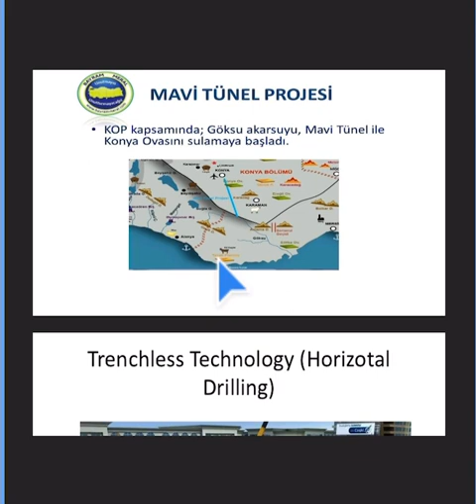Okay, I'll go through. So that's the Blue Tunnel. Blue Tunnel is the project of the two basins, between two basins. One basin has plenty of water, plenty of drinking water, and we're taking all the water from one basin to another. That is the project of the Blue Tunnel. The name of the project is the Blue Tunnel Project.

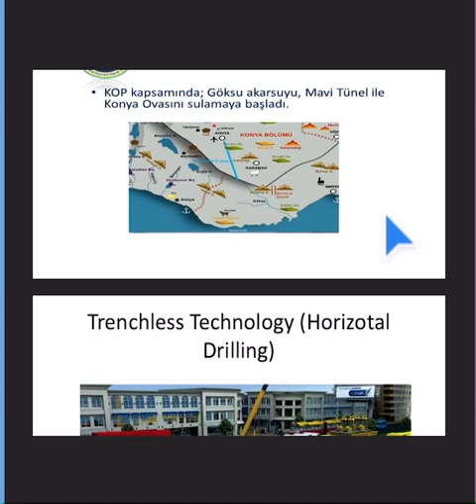And then trenchless technology, horizontal drilling. This is also a new part of water resources engineering, where without disturbing all the crowded roads on the surface, you just drill the horizontal pipe or horizontal line underground without disturbing all the traffic.

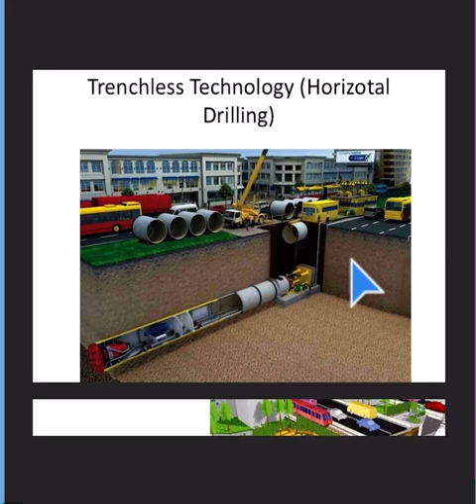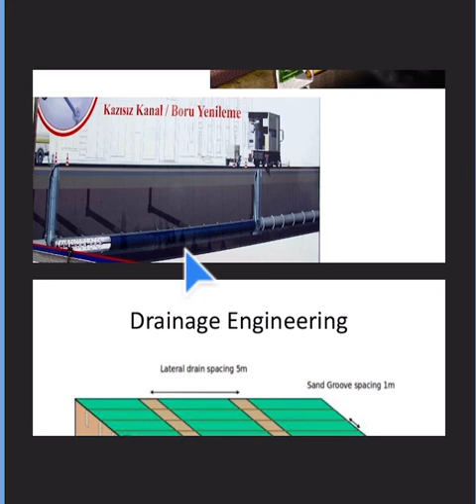You can see here the traffic. So there is no way to interrupt the traffic, and you can make all the pipeline, including water supply, wastewater collection, energy transfer and communication, everything together. You can see here the line of the horizontal drilling, and drainage engineering.

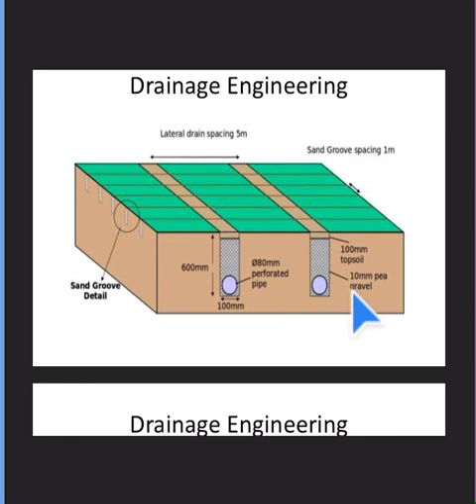So if you look at here, drainage engineering is also important for airport projects and other big projects, as well as agricultural land. So if you look at here, that is the distance of the lateral drain spacing, which is something like 5 meters, and that is the slope between the starting point and end point. This is a closed drainage system. Sometimes we can have an open drainage system or closed drainage system in the field.

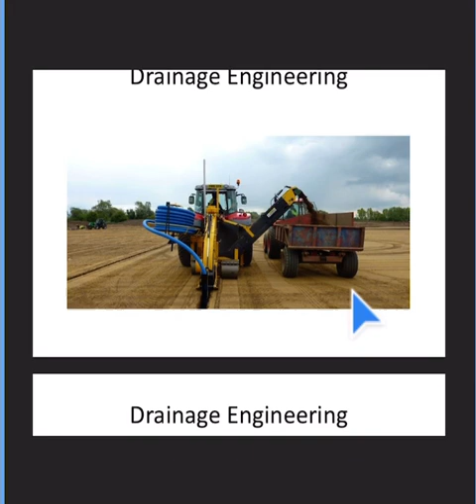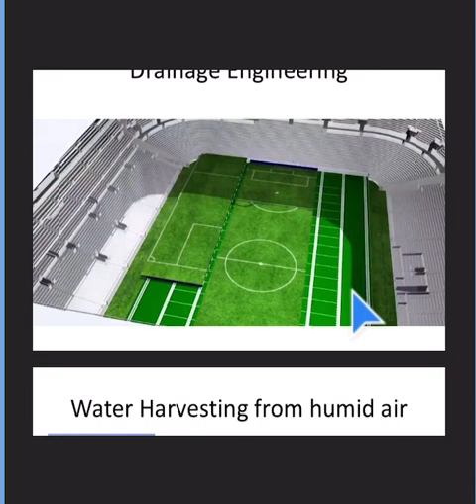Drainage engineering is a part of water resources engineering, because drainage is directly related to flooding and excess water. If you have much more excess water, you have to remove all the water in a very short time and a very effective way. That is the idea of drainage engineering as well as agricultural engineering. Drainage engineering is also important for football areas and any sports area, showing the importance of drainage engineering, which is much more the subject of civil engineering.

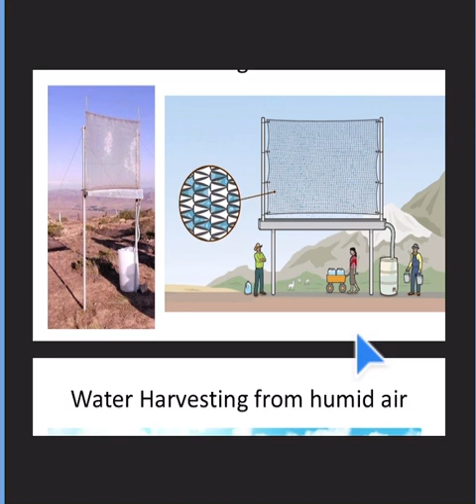And then water harvesting from humid air. So that is the idea of water harvesting from humid air, the collecting, that is the inlet, you can see here. We could have suction here, which is the negative pressure, suction means the negative pressure, and I'm taking the humid air inside this device and then producing the water.

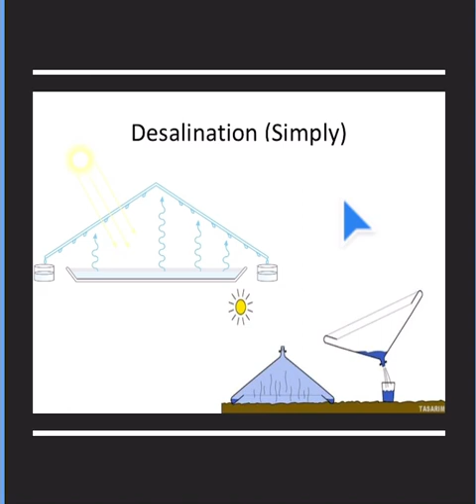That is the desalination, so this is the simple form of desalination. But in the Middle East region, what we use at the moment is a much more engineered, much more high-tech system. So this is not the high-tech system.

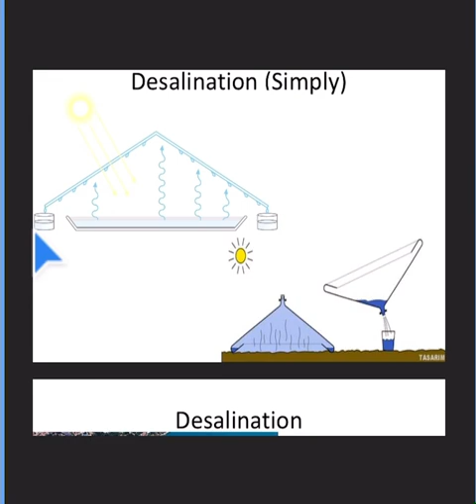This is very simple, very basic desalination. If you put the saline water here, you can see the saline water inside the cover. If you have the cover on the top, during the sunshine, all the water goes through the upper level because of evaporation, and then condensation takes place, and the condensed water is collected on both sides. You can see the collecting water on both sides, and that's the water we are taking from the desalination. So this is a very simple example of the desalination system.

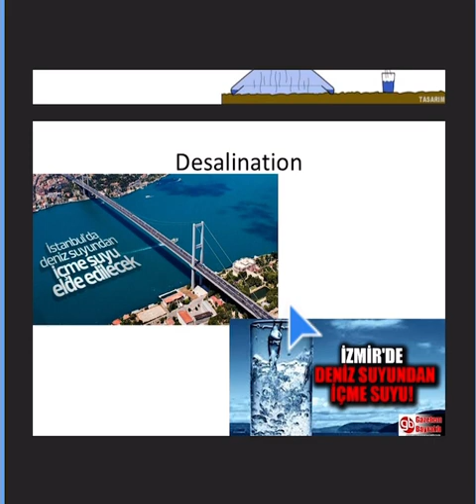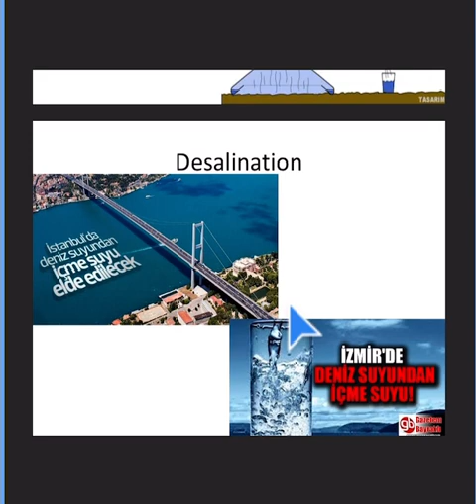What it says here is desalination in Istanbul. We are going to have a desalination process to produce potable water from the sea, and also in Izmir. That's some news from the internet about desalination in Turkey. So we could have a desalination process in Istanbul and then a desalination process in Izmir to produce potable water.

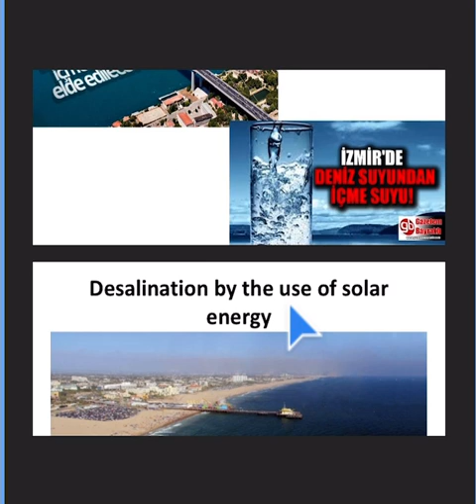You know that it is not drinking water. What we call it is potable water. Potable water means usage water, not drinking water necessarily. And desalination by the use of solar energy.

So this project is very much a suitable project for your country. If you live in the Middle East region, you can do this kind of project by the use of solar energy, which is very much renewable energy. So that is the recycling of the system, recyclable reuse of the water, and sustainable development, sustainable environmentally friendly technology.

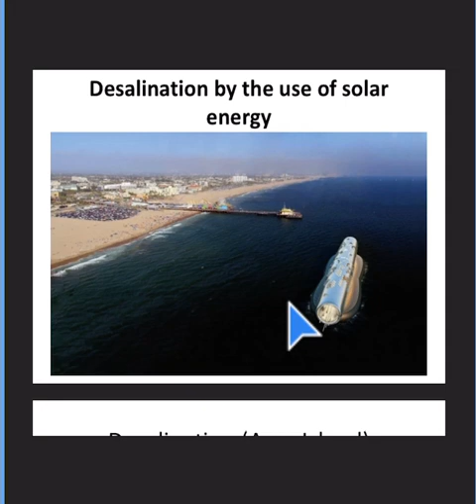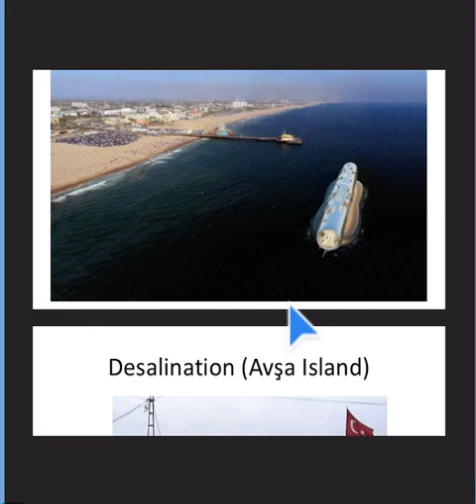So if you produce energy from the solar energy, and then use this energy by means of the desalination of the seawater, you can produce potable water easily. That is the idea of producing potable water from the sea, which is a very good, very impressive project actually for your country. Yeah, it could be for your country.

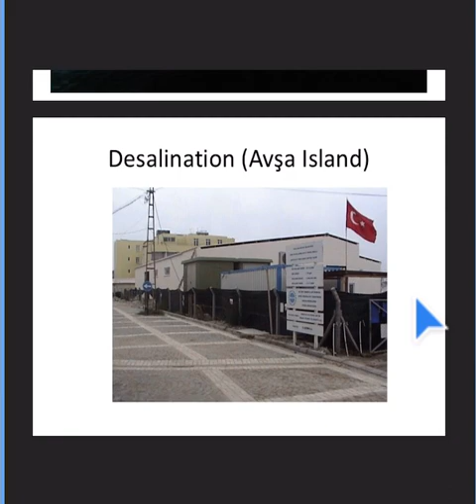And yes, we have some examples in Turkey. We have desalination on islands in the Marmara Sea. Have you been there? Avşa Island - probably not. You know, the great island and the small island, something like that in the Marmara Sea. Yes, we have a desalination process in Avşa Island in Turkey.

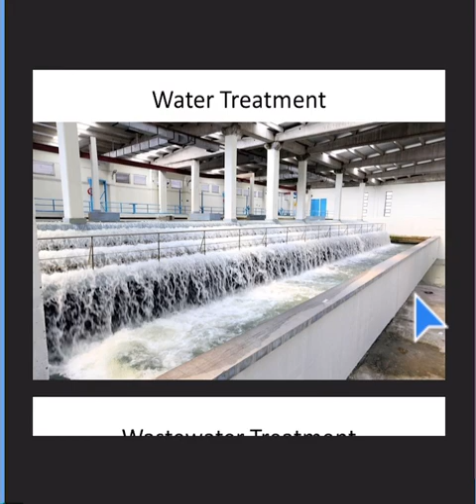And you know water treatment, the means of water treatment to produce safe water, safe drinking water, as well as wastewater treatment, recycling and reuse of wastewater. Afterwards, if water is being treated, we can recycle it, we can reuse it. You know the idea of recycling wastewater.

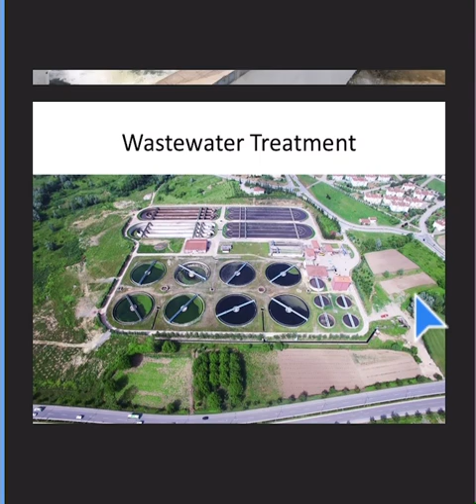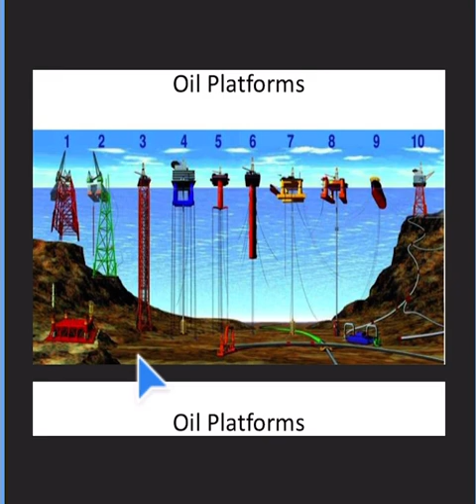And water resources engineering is directly related to oil platforms in the sea or in the ocean. It could be suspended, it could have a cable connection, it could be directly based on the main rock at the bottom of the sea, something like that. So we have a kind of oil platform. This is a very much engineered oil platform, which is the subject of water resources engineering.

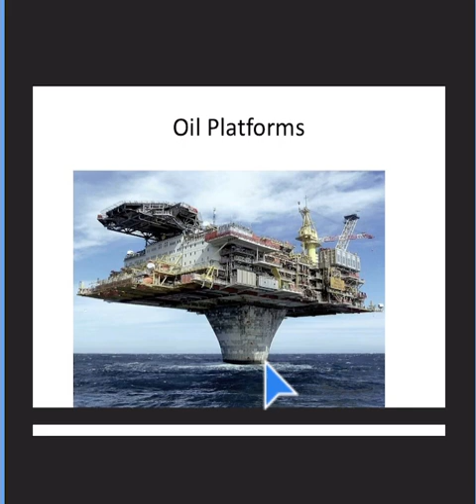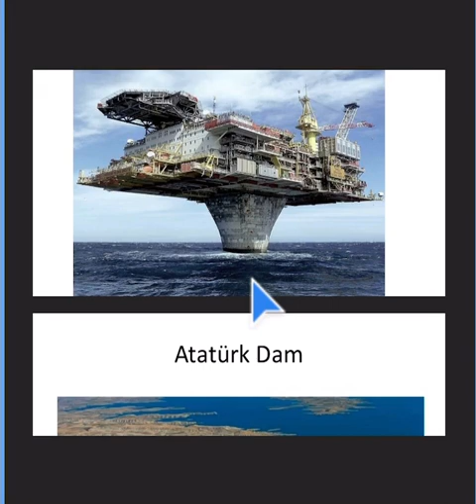So the problem here, the kind of problem, is the wave action. What kind of wave action do we expect here, and then what is the quality of the concrete, quality of the material, everything together here.

And dam project, yes, hydropower energy. So we are going to move to the dam project, starting from the project of the dam, design of the dam, and then construction of the dam, and as well as the operation of the dam. In this course we have some length of weeks for the dam, because the dam is important. The dam is important for Turkey, the dam is important for your country as well.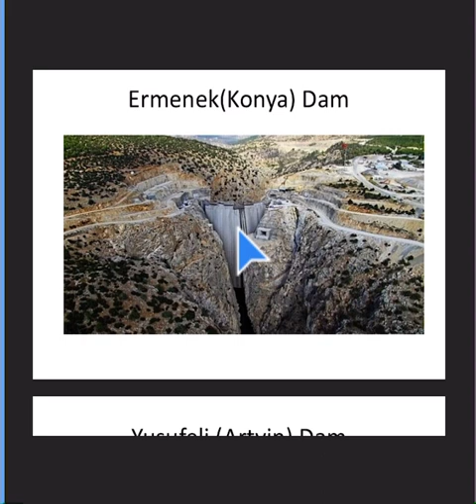So this is another type of dam in Turkey. In the middle of Turkey, we could have this kind of valley. You can see the valley here, very narrow, and if you put the dam between the two sides of the rocks, that's a very impressive dam project in Turkey. And this is a very famous dam construction in Turkey. You probably know that from the Discovery Channel. If you follow the Discovery Channel, you can see this kind of Yusufeli dam in Turkey.

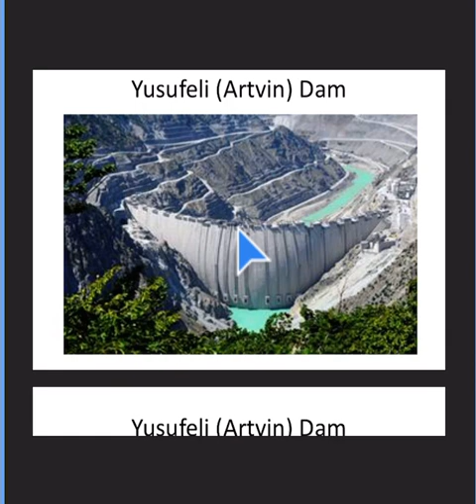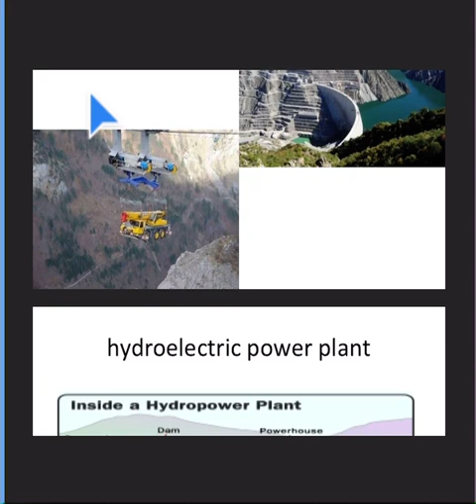Very big and very large dam. So you can see here all the construction machines transferring, by the crane, from one side of the dam to another side.

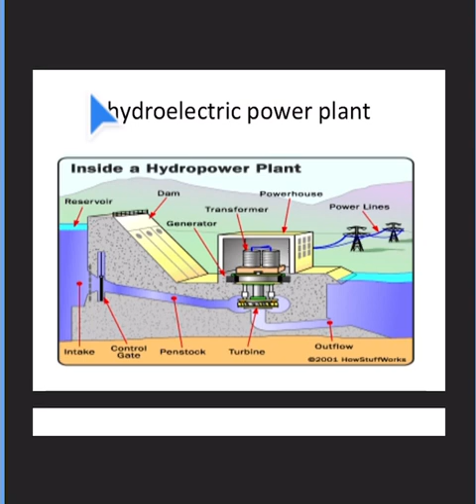Hydroelectric power plants. I'm gonna give you some information about the hydroelectric power plant: how it works, the design of the hydroelectric power plant, and its operation and maintenance.

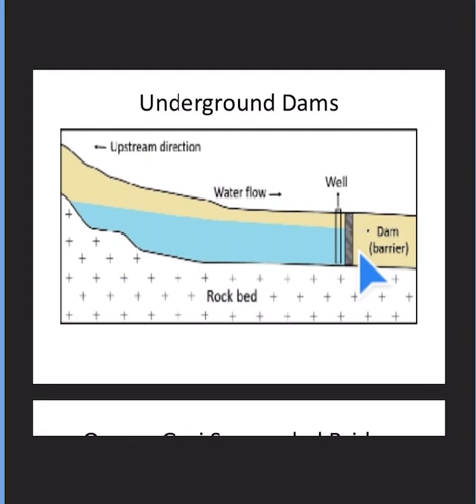And underground dams. Nowadays, all the news says we have to build underground dams rather than surface dams. Many dams we have in Turkey are constructed on the surface of the earth. What about this? That is the underground dam. There is no way to see the dams with your eyes because the construction is underground. That is the idea. All the news in Turkey says because of the drought and water shortage, if you have less water, you have to construct underground dams, something like that. You can see it in all the news.

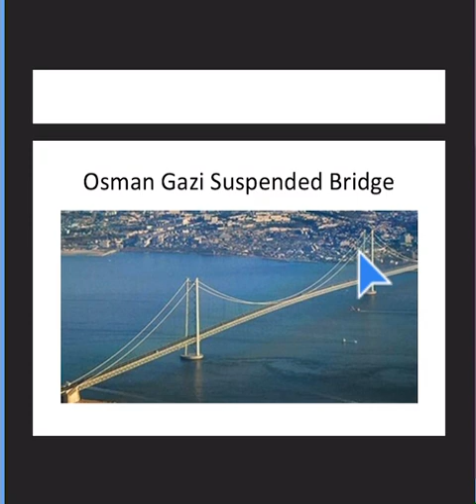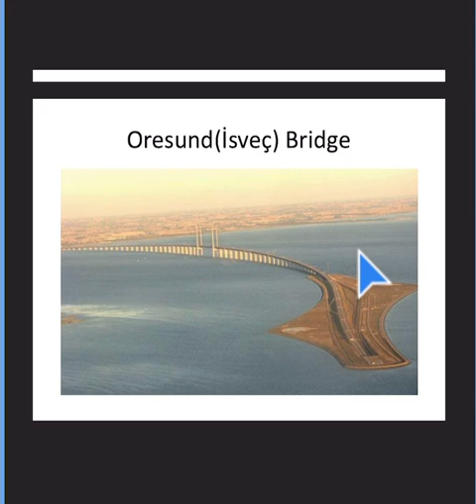And the suspended bridge is also related to water resources, because of wave action or coastal engineering, something like that. You could have this kind of project in your country, like we have in Turkey — that is the Sweden one bridge, which is very much related to water resources engineering.

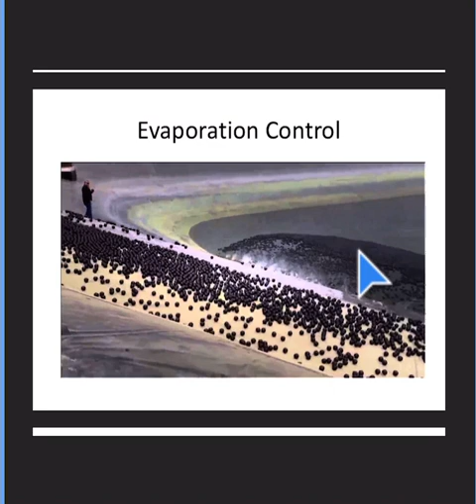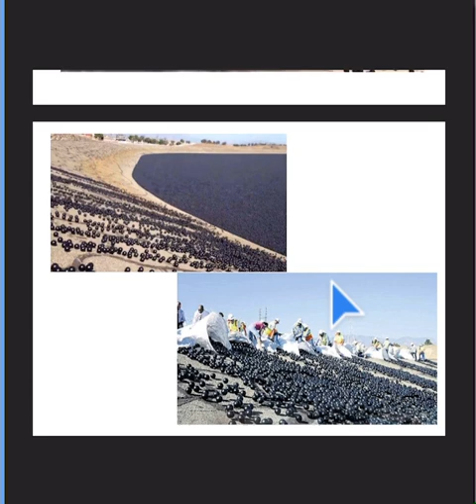What about this? This is evaporation control. If you have a storage place or dam reservoir, you have to keep much water inside the storage system. So we have to reduce the evaporation by use of this — what is that? It's black balls. Millions and millions of black balls to reduce the evaporation, just put on the surface of the water. And the rubber dam, which is removable.

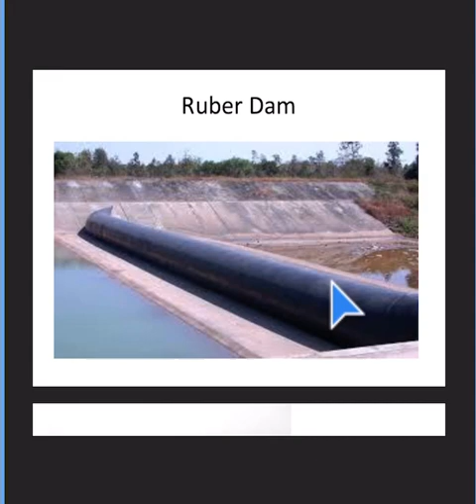That's the mobile dam, something like that. Yes, it's not in a constant position, so we don't have any concrete or solid material. That is the rubber dam. Sometimes you have to move it, throw it away, and then if you have a rise of water, plenty of water, you can use the rubber dam. That is the operation of the rubber dam.

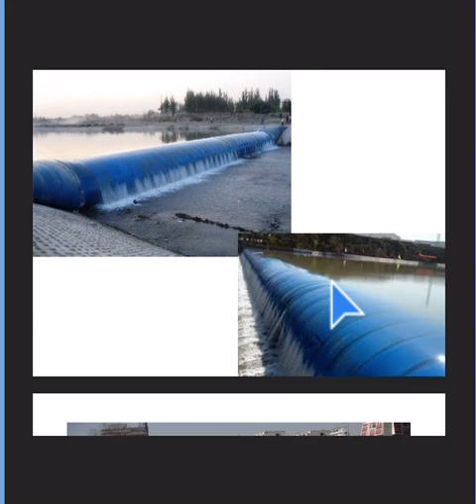Do you have a rubber dam in your country? I have no idea — in your country, what about in your country?

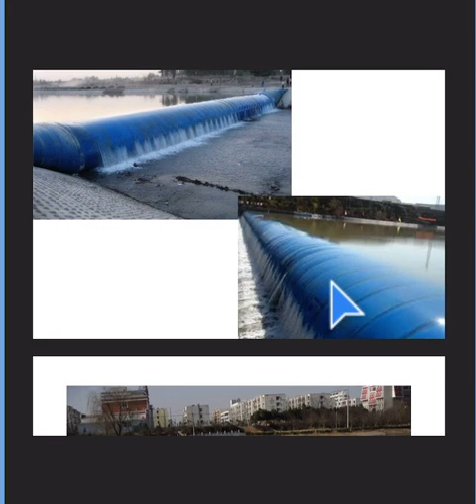Yes, we have rubber dams in Turkey. That is something like below — rubber dam to control the water level inside any canal or channel, any waterway, so you can control it.

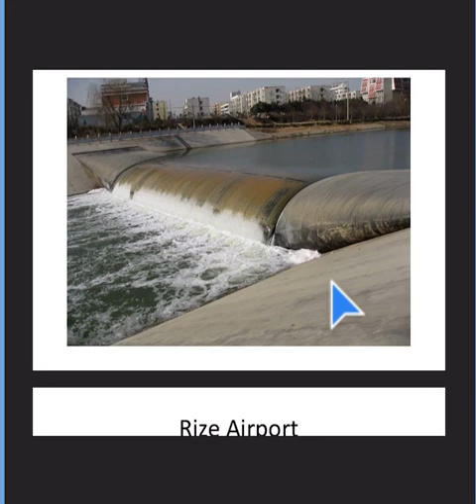And then, constructing airports in the sea — what we call an artificial island or artificial airport, filling the sea to gain land and then building the airport. Yes, in Doha, Qatar, the airport is also like this — on the sea, the way of the airport on the sea in Qatar.

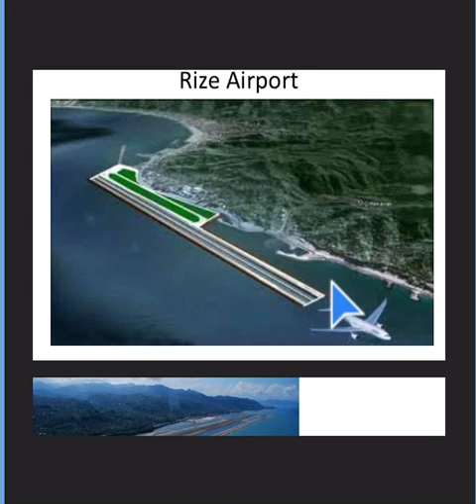Have you been there? Qatar, Doha.

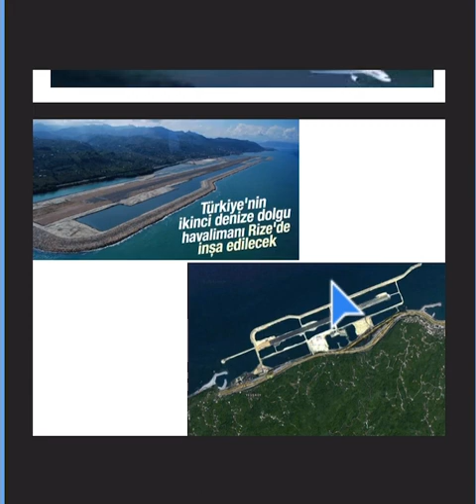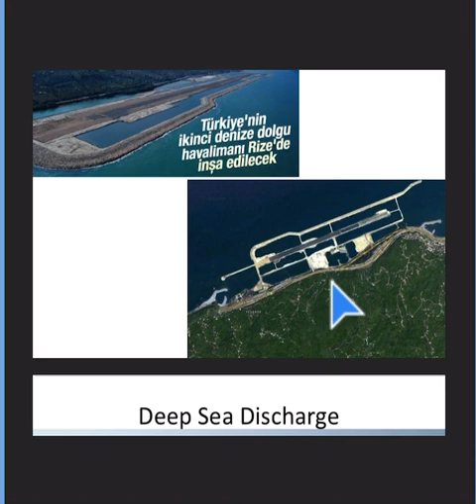So that is the project — that's the level of the project of the airport inside the sea, which is the Black Sea. And then you can imagine the regime of the Black Sea, which is very dangerous.

Deep sea discharge. So what are we discharging with this pipe to the sea? We are discharging something to the sea by use of the pipeline. So what are we discharging to the sea here? Any idea? Do you have an idea about this project?

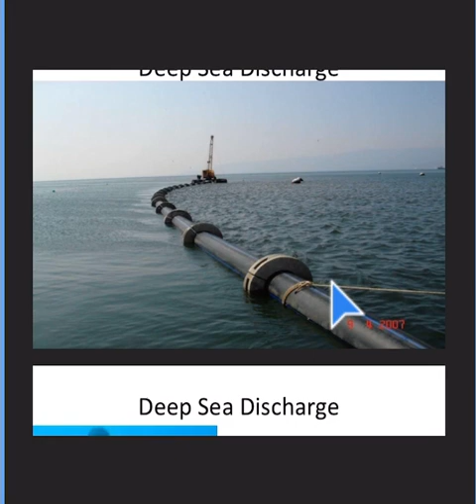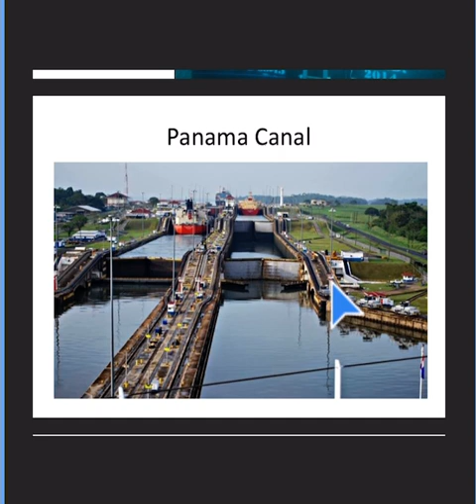Treated water, yes, discharging from a wastewater treatment plant. Deep sea discharge — what we call deep sea discharge, which is very much related to water resources engineering. And in the past, the Panama Canal is directly related to water resources engineering, which is a very good example of water resources engineering.

And Palm Island in Dubai — you know Palm Island in Dubai, yes. This is the artificial island, artificial island, man-made island, Palm Island.

And this is also in Dubai. This is the first one, Palm Island. That's the second one here. And this is the map of the world in the sea. Yeah, global island.

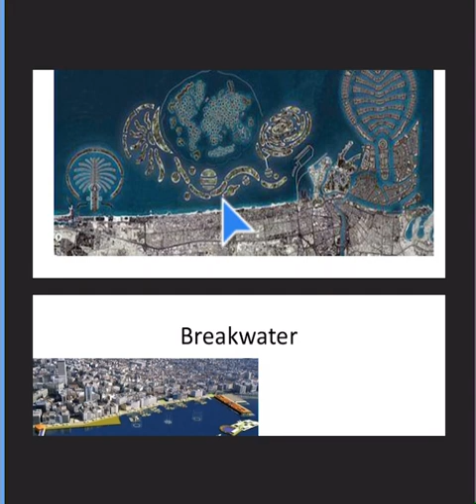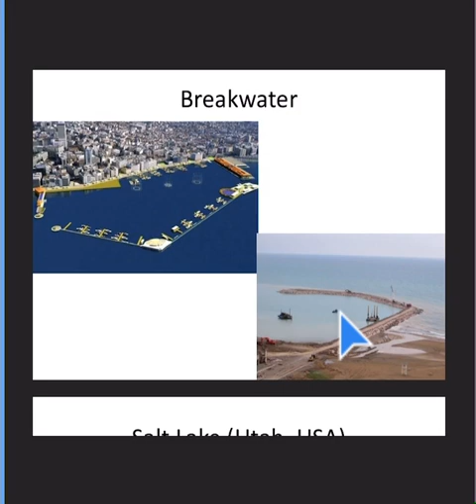Yeah, they are all projects of artificial islands inside the sea. And if you remember breakwaters, in coastal areas you can see this kind of breakwater to keep all the floating objects inside. This is also some kind of breakwater.

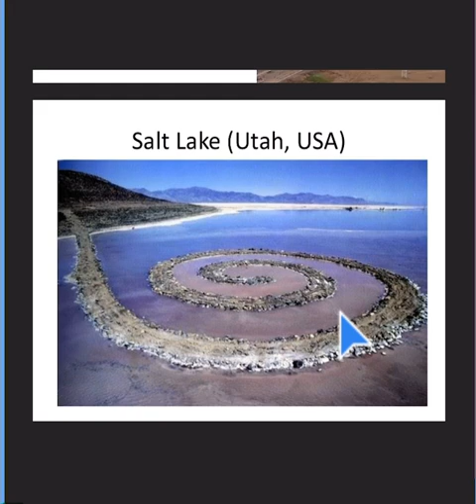In United States, something like the scientific arts, Salt Lake. So this is the picture from the Salt Lake from United States. The wave breaker, that's right, exactly. Breakwater, wave breaker, and waterways.

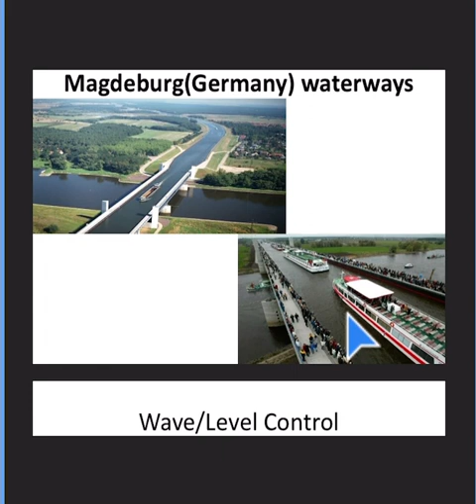Some high-tech waterways from Germany. You can see this kind of picture, waterway, and that is the bridge, also bridge, and then it's also waterway. So everyone is looking at this, ships and all around.

Wave and level control. This picture is from Netherlands. To keep the water inside here, because the level of the Netherlands is much less than the sea level. So that is what they are doing here, controlling the seawater and then the river water by means of a gate, which is a removable gate.

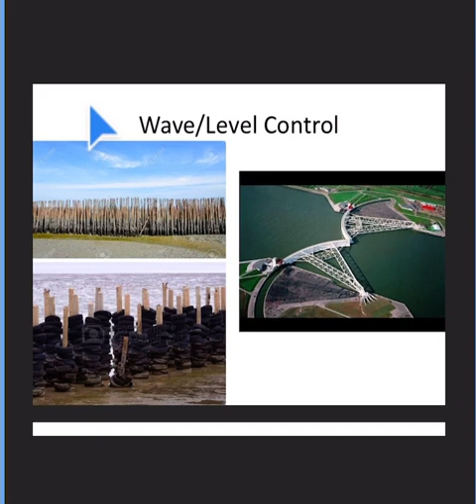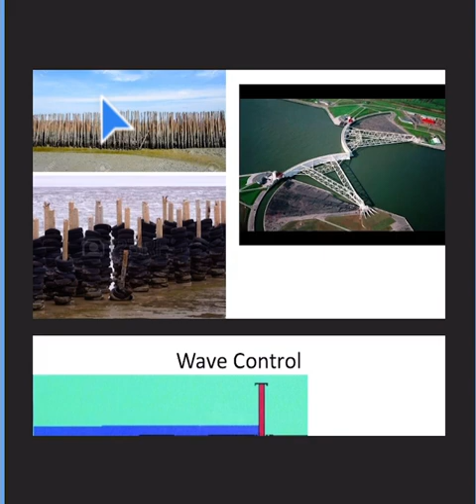This is the basic wave level control mechanism. And this is also wave and level control using used car tires. If you use used car tires, you can make this kind of wave control. That is if you remember something from fluid mechanics, Archimedes' principle. This is the action of the Archimedes' principle.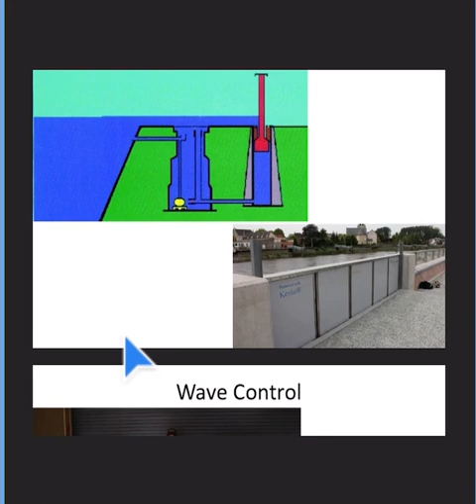During the flooding, if the flooding just reaches the water level somewhere here, all the water goes through this compartment and then raises the wall, and that is the wall, the red one here. This is the actual picture, what we call wave control. These two gentlemen keeping away from the water.

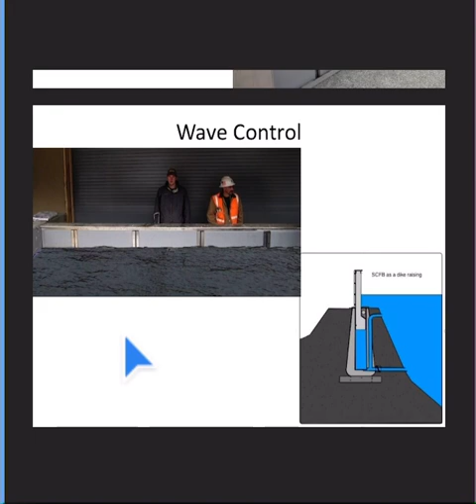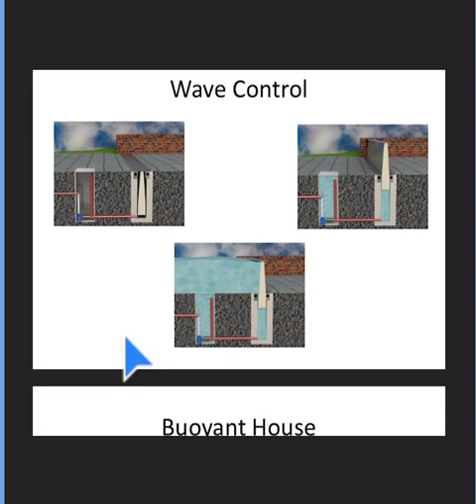So it's something like the balancing of two tanks by means of Archimedes' principle. Wave control, you can see here, two compartments together. If you have water in the first compartment, the wall goes up like this, so you can keep the buoyant house.

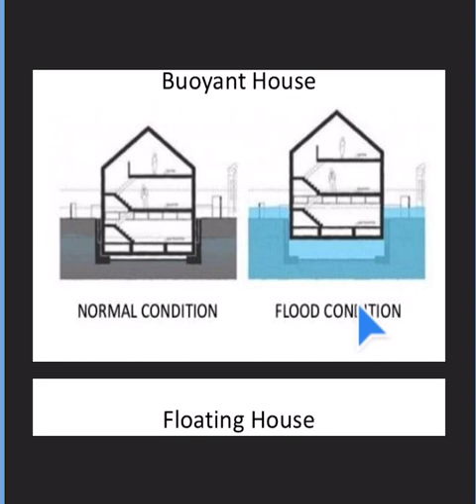That is the condition of the house, what we call the normal condition, and that is the condition of the house during the flooding. So flood control, flooding management by means of the house.

You can see here a swimming house or floating house, like a floating dam, yes exactly. And also the floating house, which is directly related to the buoyant force. You can generate the buoyant force here to keep this house or construction swimming or floating.

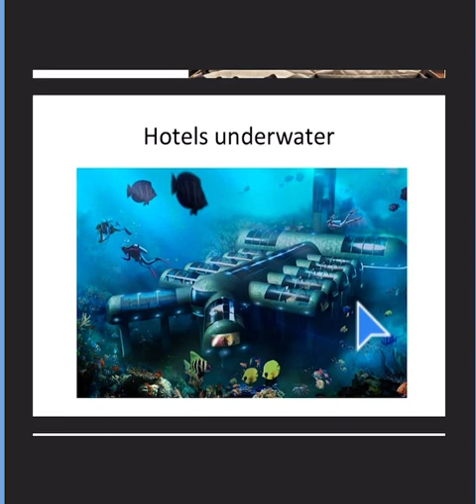And floating house, this is the example of the floating house, or hotels underwater. Maybe in the future we can see this kind of hotels underwater. Now there is one in Japan. Hotels underwater is also a subject of water resources engineering. And underwater city, Japan, yes.

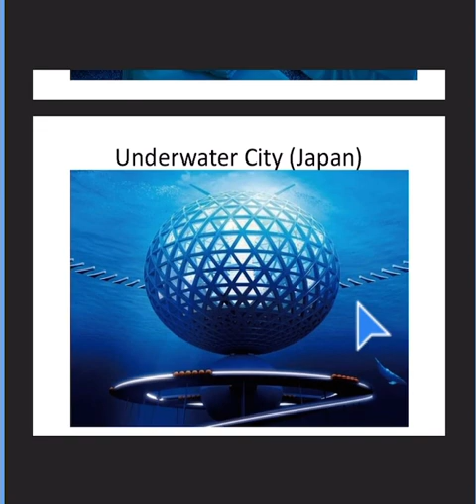If you remember what I told you at the beginning of the course, just imagine. You can make your imagination, or you can improve your imagination about water resources engineering, water resources systems. So this is the idea of the underwater city.

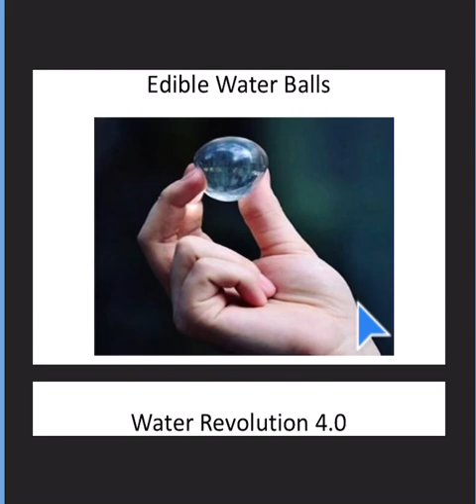And what about this? Edible water balls. Maybe in the future we are going to have this kind of edible water balls. Then you can see the edible water, yes. So this is also edible water.

And if you remember Water Revolution 4, what it says is we have to take the water from the sources and then use it again and again and again. So that must be the recycle or reuse of the water. That is the idea of Water Revolution 4.

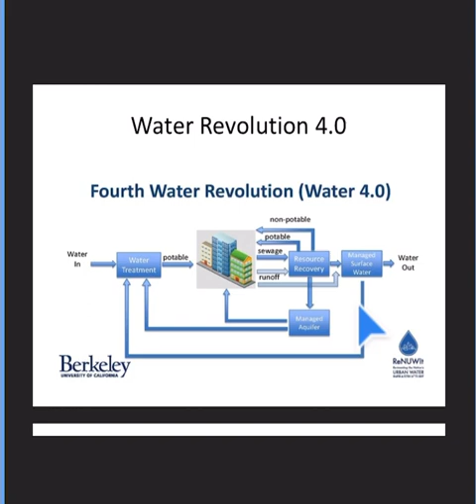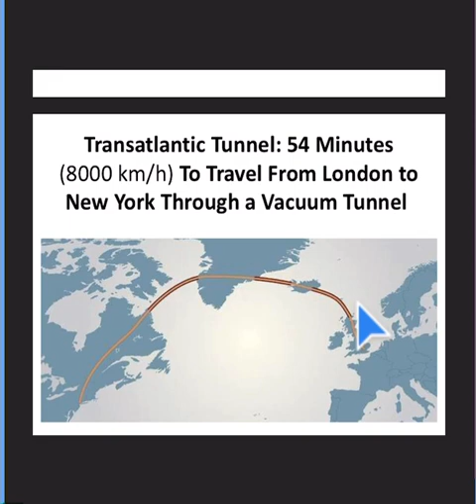And also Transatlantic Tunnel. What it says: Transatlantic Tunnel, travel from London to New York, takes only 54 minutes, 8,000 km per hour, in a vacuum tunnel, some of it under ocean, some on land. So it could be possible in the future. Why not? Transatlantic Tunnel, so that is the project idea of the Transatlantic Tunnel.